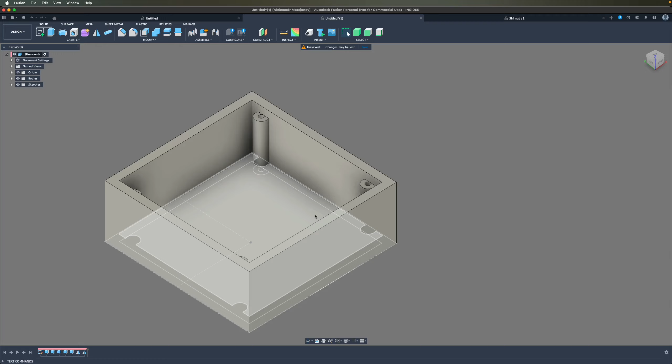Alright, let's continue and do some more stuff related to nuts and embedding them. So first, let me go back in history here. Yeah, like that. No, next one.

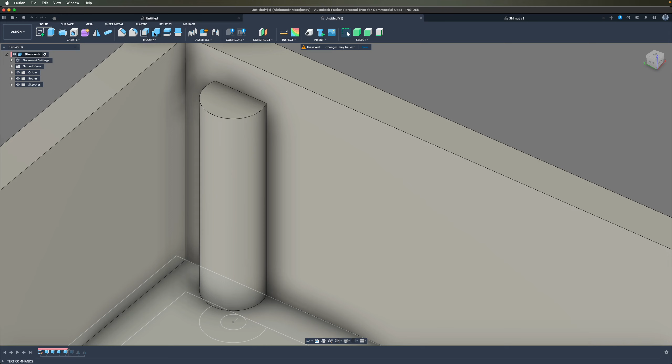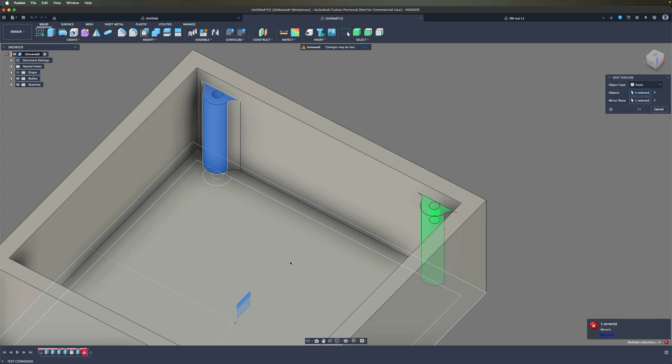So here I'll add a new step, which will be adding fillets, just to make it fancy looking and maybe easier to print and stronger. Now if I go down to this and do this... oh, there's an error. I double click and re-select faces because now there are two more faces. Ta-da! Now those two things are completely mirrored.

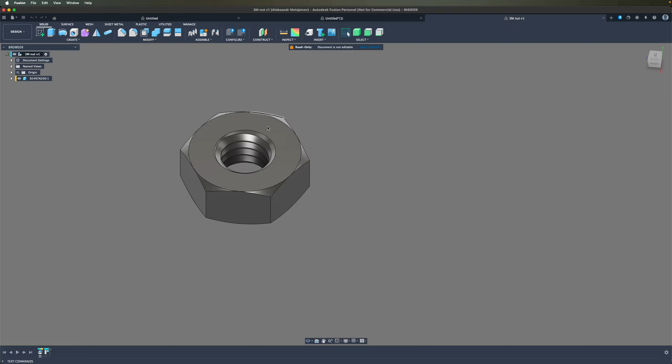So what I want is to embed a nut. I have a couple options. I have a nut here, I can just look at the distance between them, so it's 5.5. Let's do it the first way.

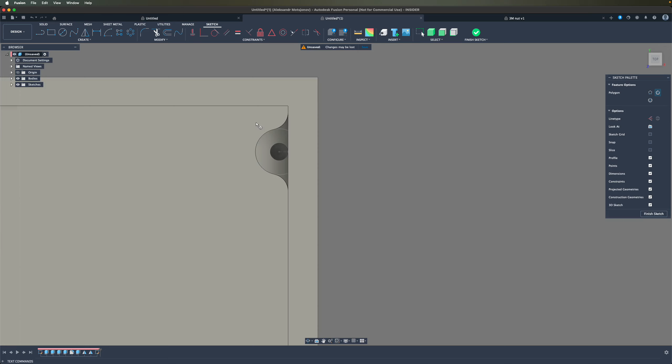We will make a sketch on this surface of this plane. Now we'll do a polygon like this. Oops, I pressed P for project. I can find it here, project - which means I can take anything I can see and project that geometry onto this sketch.

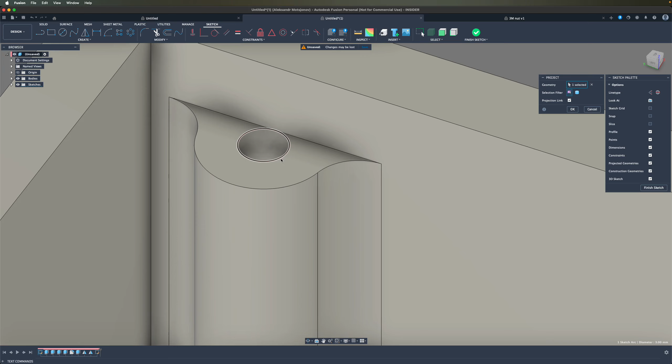So if I look from the side, this is my sketch. You see the circle is now - let me just hide the body. Now the circle is part of the sketch. Looking from the top again, the reason I took this circle is because I want to make this thing like this.

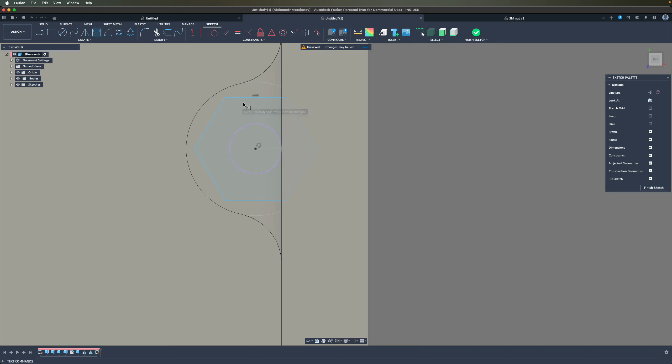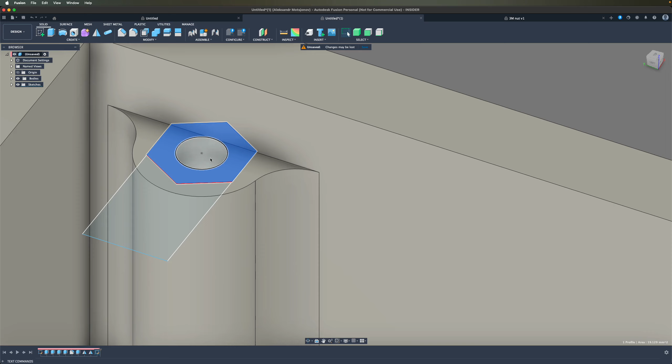Now I'll make this line parallel to the ground, and I'll set a different distance between them - 5.5. That's my normal nut. Alright, and then I'll do something more - draw a line over here and extend it, essentially like this. Now I have the sketch with all these profiles that I can extrude.

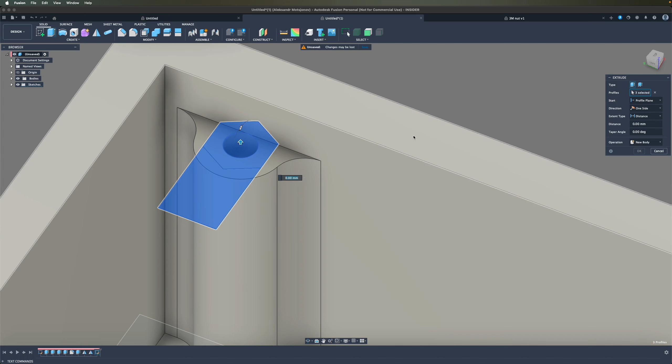I'll select these two. Let me think about this. So one way I can do it is extrude. If I just start extruding, it'll extrude from the plane of the sketch - that's not what I want. I want offset, so let's offset by, say, 10. Nope, -6. Yep, and we just cut.

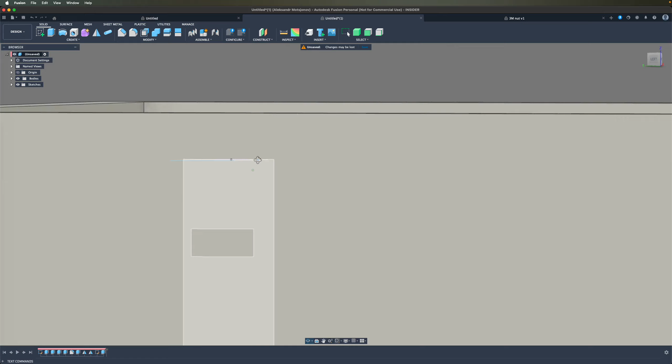And now that's where our nut will go. Well, except I need its thickness - let me check. It's 2.4. Let me go back to this command. 2.5, yeah perfect, some slack.

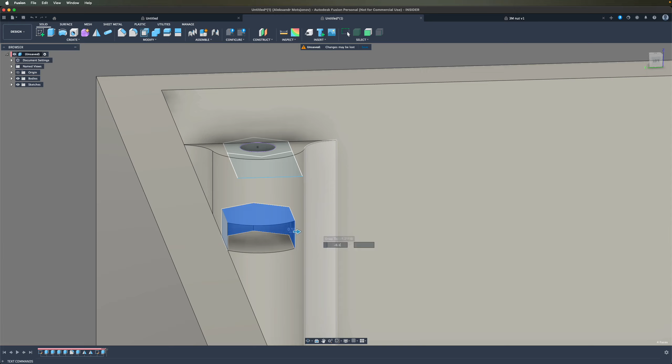Now what I usually do, I select all those faces even though I just measured them. I press Q, which is offset face over here, so I can offset them in or out. In my case I'll do -0.1, just a little bit of slack for the print.

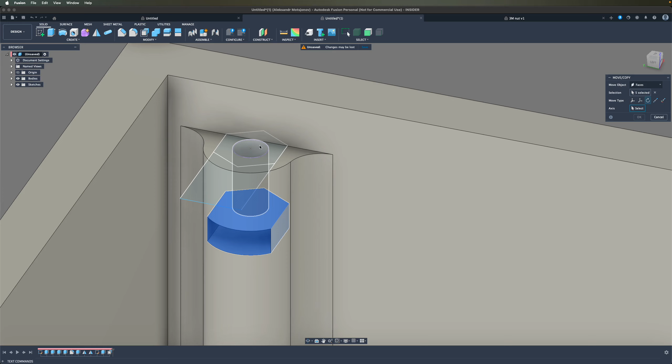And I selected faces, I press M for move - move is over here, move/copy. I'll press this button, rotate, and select the axis - the axis will be this cylinder - and I'll just turn it slightly, because when we insert this nut, I want it to be comfortable, more from inside.

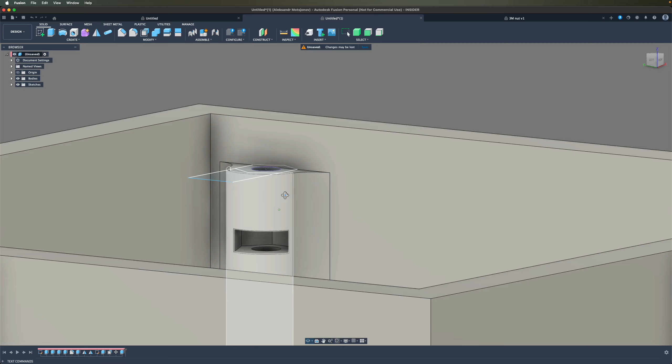All right, so that's where our nut will go. While we're here, let's extrude more, for however long our bolt will be. Let's hide those sketches, and that's one way - now imagine you put the bolt in. First you put the nut in from the side, then your bolt goes down and you can screw it in. I hope you understand what's happening there.

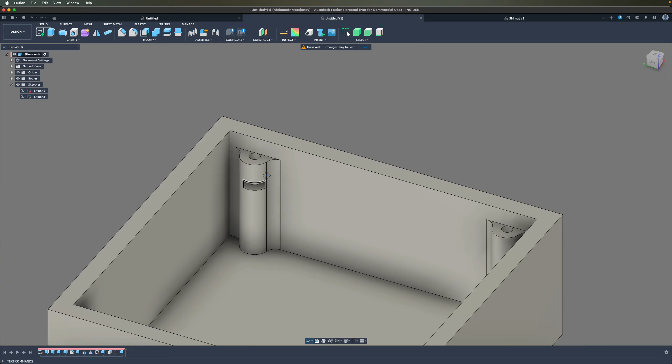And yeah, classic way - you can just select all those faces and mirror them again. You've seen this happening. I'll just select - right, so on these two sides we did it this way. This is one way of doing it. And the other way...

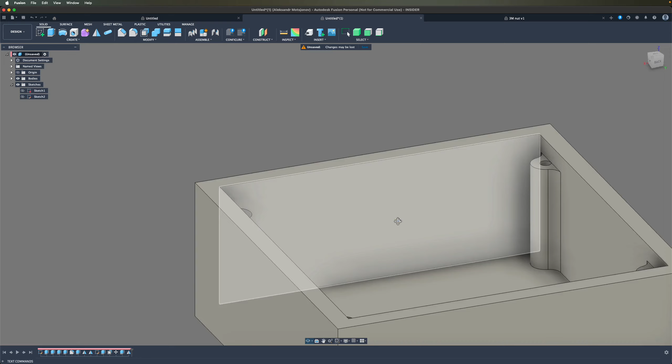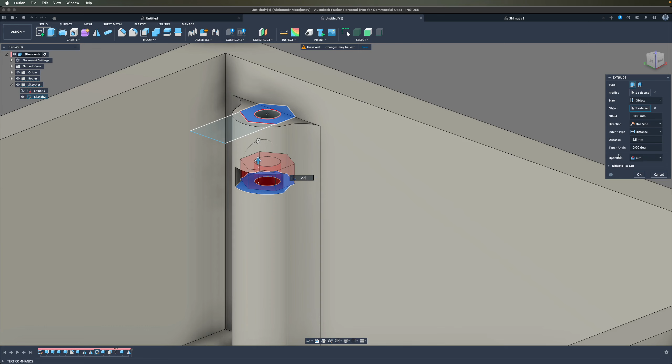I'm not quite ready to show it, but let's just do it. So let me select that. Let me do this from object - so from here, I just want to make a positive body, so 2.5. I'll select the new body. So now there's a whole thing, and sorry, the body is here.

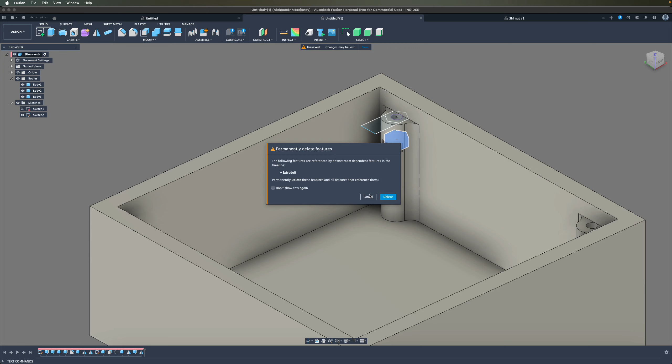Now let me copy it on the other side. What I'm trying to do is show the second method of embedding nuts. Alright, so now let's kill that one, delete - oh, I'm in history mode, so remove. Now that other nut is sitting inside.

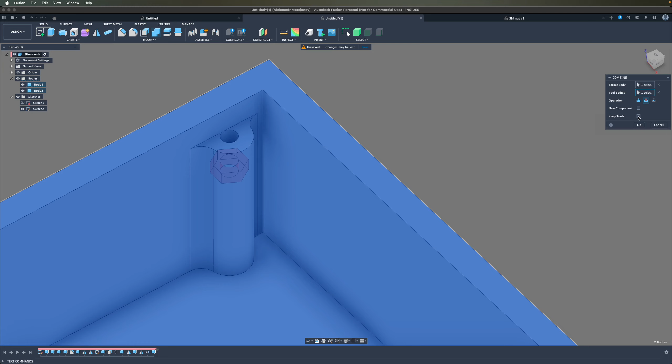So what I'll do - first let me make this hole bigger. So this hole is much bigger now. This nut, I'll do the combine, which is this Boolean operation. So this is my target body, and my tool body will be this nut, and I'll select cut. And I'm not going to keep the tool, so the nut will disappear.

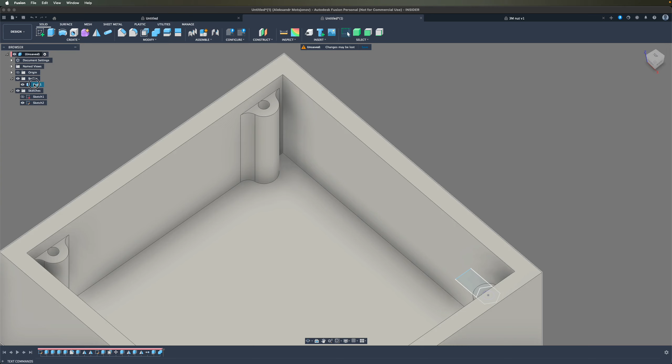Now if I show you the X-ray mode, or this section display which I really like, you can see there's a hole inside, so it's completely captive. Now cancel that - let's just improvise. Let me save it, so now I'm making an STL file, ready for print.

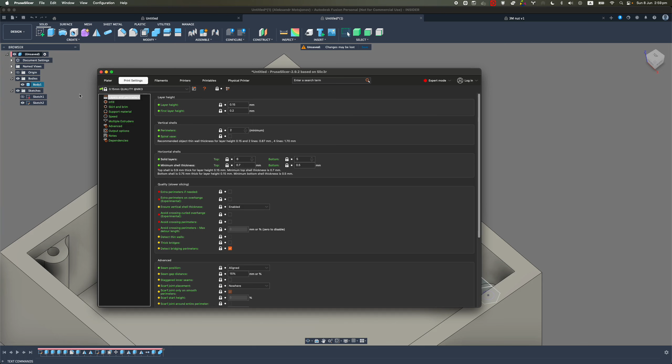3D modeling box example, yes. Now let's go to PrusaSlicer. Right, so this is our PrusaSlicer. Let's load in our body. Come on, how do I do that? Right, I do it from here - I'll just drag and drop.

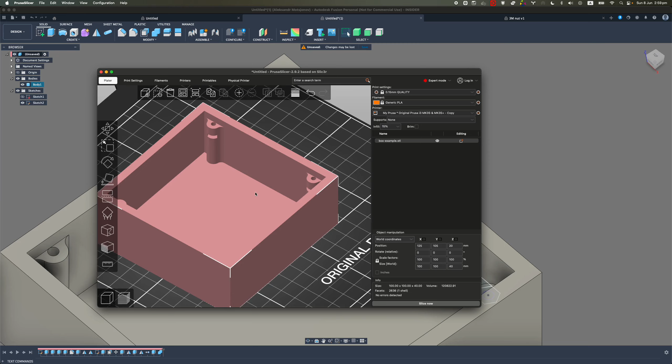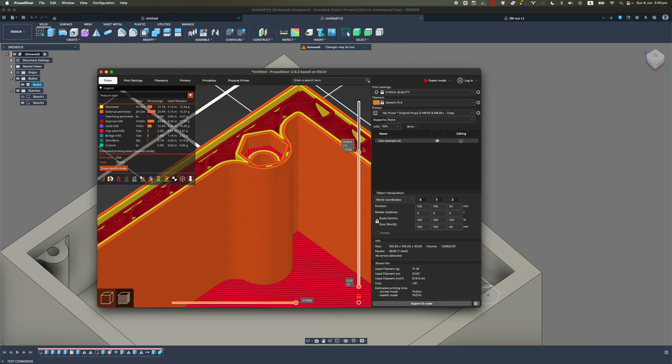Okay, so the idea with the second way of embedding a nut is, well, here's my slicing, right - basically you want to pause your print over here. So it's printing, and just before it starts doing this cap, you pause it, put your nut inside, and resume the print, and it continues printing. Then your nut will stay inside, and you can use it as your tightening thing that will hold the bolt in place.

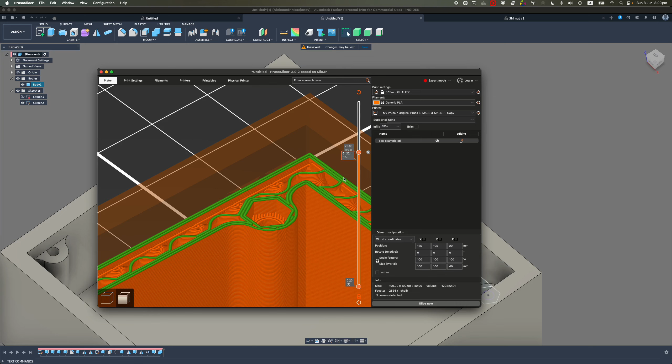With PrusaSlicer, and I'm sure with other slicers, there's actually some way - I don't remember how to do it, I think it's this. If I press this plus, it did this thing - I don't remember, color change, delete. Basically there's a way in the slicer to make it pause automatically on a particular layer, compared to waiting for your layer manually. And so that's the second way of embedding it.

But I usually just do this - I'll slide my nut inside and put the bolt through. That's it. Thank you very much.